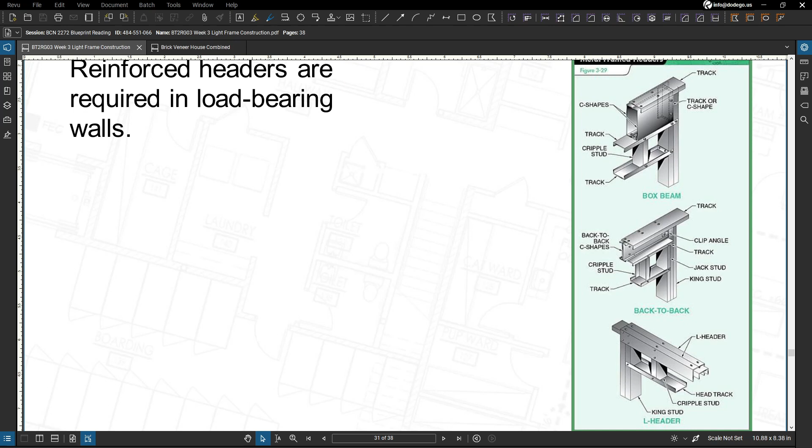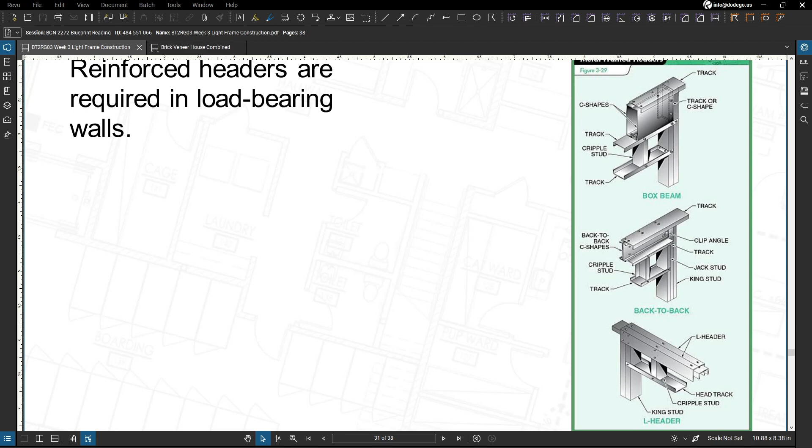So your reinforced headers are going to be required in load-bearing walls. And headers are going to be constructed with two equal size C-shapes forming box beams or back-to-back headers, or with one or two angle pieces that fit over the top track forming L headers. Now your box beam headers should be properly insulated before any installation is complete. Your main takeaway is that your reinforced headers are going to be required in load-bearing walls.

Now, non-load-bearing interior partitions are generally constructed of a lighter gauge metal stud. And when load-bearing interior partitions are required, heavier gauge studs are to be used. Now, gypsum board is then applied using self-tapping screws. Your main takeaway is that your non-load-bearing interior partitions are generally constructed of lighter gauge metals.

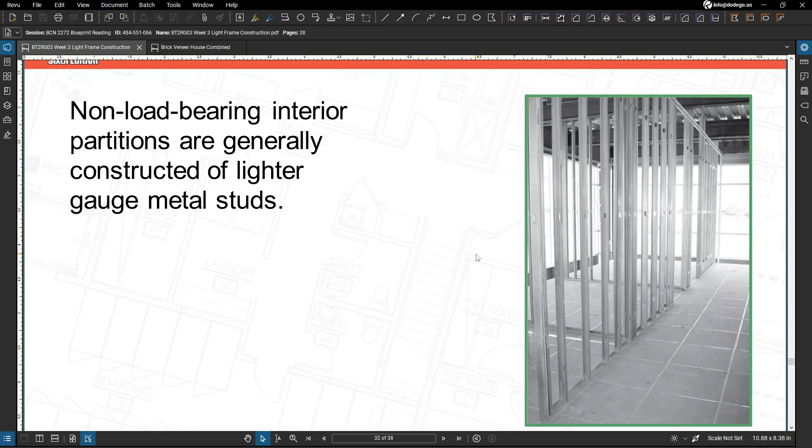In regards to your open web steel joists, these are often used in conjunction with metal framing systems and masonry construction. Now, an open web steel joist is a structural steel member constructed with steel angles and bars that are used as chords with your steel angles or your bars extending between those chords at an angle. Now, open web steel joists provide your structural support for floors and also roofs of buildings that allow for passage and the concealment of pipes, ducts, and electrical conduit within the depth of your joist.

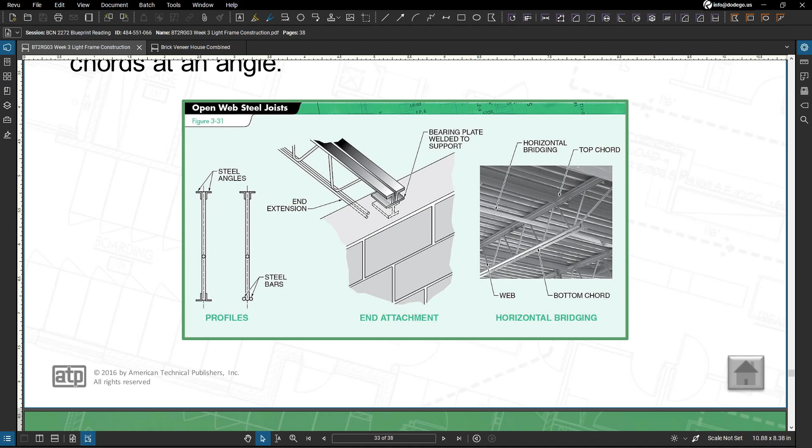Your slab-on-grade foundations are used extensively in your warmer climates and areas with high water tables, but may also be used in colder climates. In those colder climates, a footing and a short rim wall that extends below the frost line supports the floor slab. In your warmer climates, a thickened perimeter footing is used since there is no foundation movement caused by the freezing and the thawing cycles of the soil itself. Main takeaway is that slab-on-grade foundations are going to be used extensively in warmer climates and in areas with higher water tables.

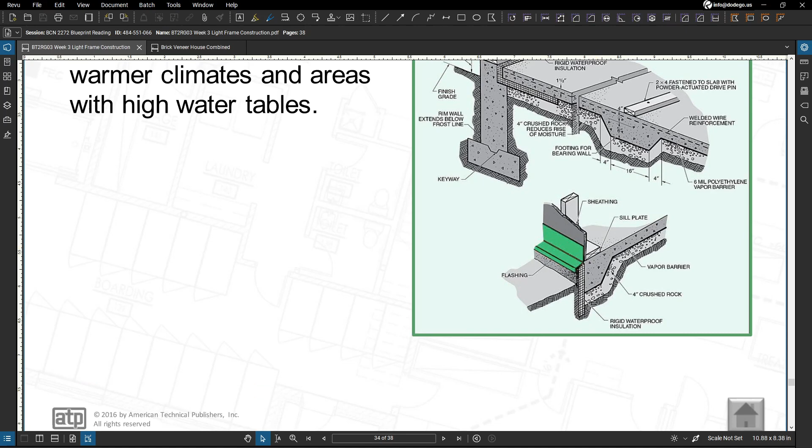Your grade beam foundations are going to be used where you have unstable soil conditions, and those grade beam foundations are supported by piers spaced at regular intervals that extend into the ground to a depth necessary to reach a solid supporting soil or rock. And that grade beam foundation can be used on level or steeply sloped lots.

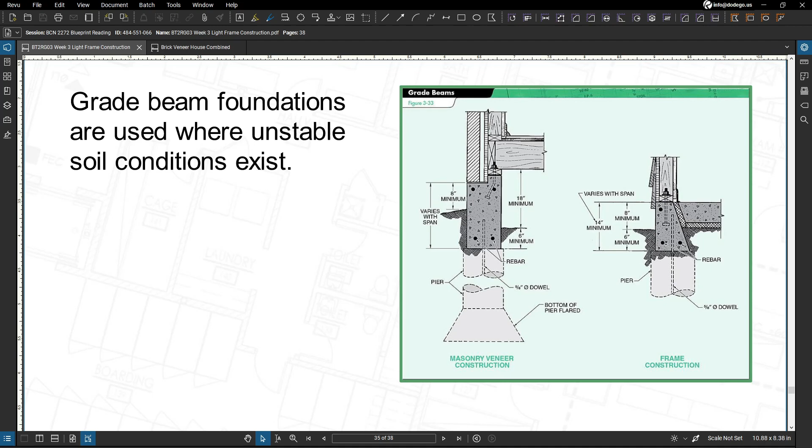Now, due to engineering and your common building code requirements, the basic building structure, whether it's wood, metal, or masonry, does not vary greatly between different regions of the country. However, precautions must be taken in regions subjected to excessively high winds or where there is a danger of earthquakes, your seismic zones, just to ensure that the buildings can withstand great stresses.

Your rebar is going to be required in all concrete or masonry foundation walls constructed in these particular regions. In addition, special ties such as a hurricane tie or other structural reinforcement may be required to fasten that foundation to the building framework and to fasten the various framing members together. Now, your wall rigidity is increased by using strong diagonal braces and a thicker sheathing. So keep that in mind.

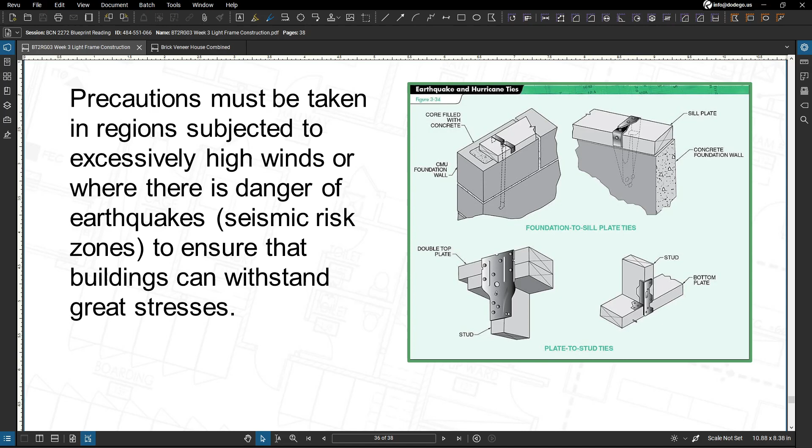In your seismic zones, buildings are going to be designed to counteract horizontal shear forces in the framework. And shear walls with a variety of specialized tie downs and anchoring systems provide structural protection against forces exerted during an earthquake. Now those tie downs and those anchoring systems provide a frame that is rigid at the connecting points. Your main takeaway is that in those seismic zones, buildings are designed to counteract the horizontal shear forces in the framework.

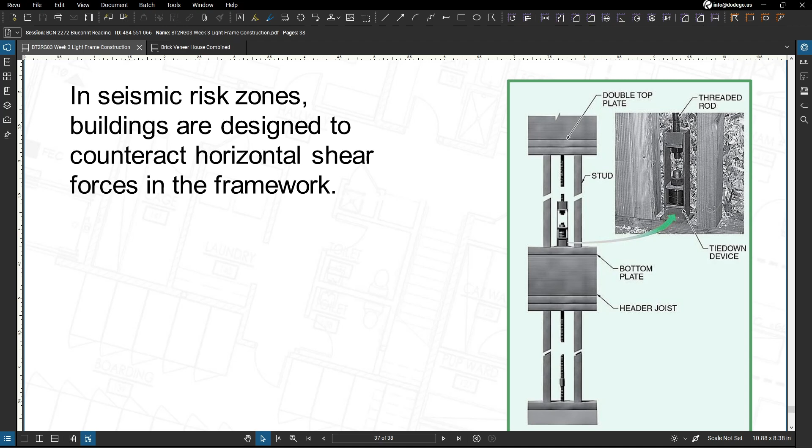And lastly, the primary cause for regional variations in building materials and construction methods is climate. So sustainable construction methods place a special emphasis on increased levels of resistance to heat and cold transmission of the building materials used in the structure. So construction materials are going to be rated with an R value, and that R value is a value that represents the ability of a material to resist heat flow.

And most insulation products have an R value listed on the packaging. The higher the R value, the greater the resistance to heat flow. The total R value of that wall includes the R value of the framing and sheathing material plus the insulation placed within the wall. So an airspace such as the one between the wythes in a masonry cavity wall adds to the total R value of the wall itself.